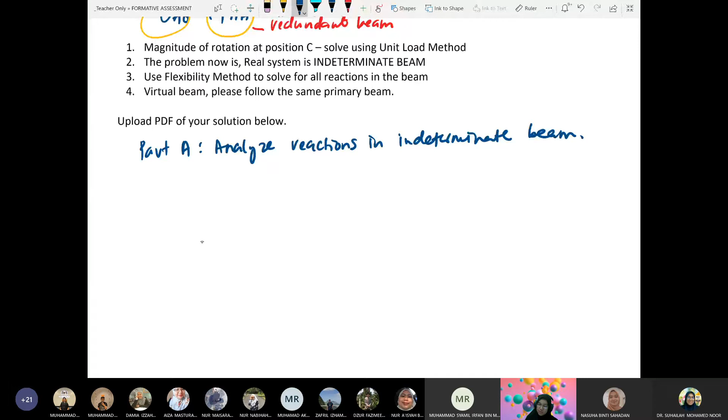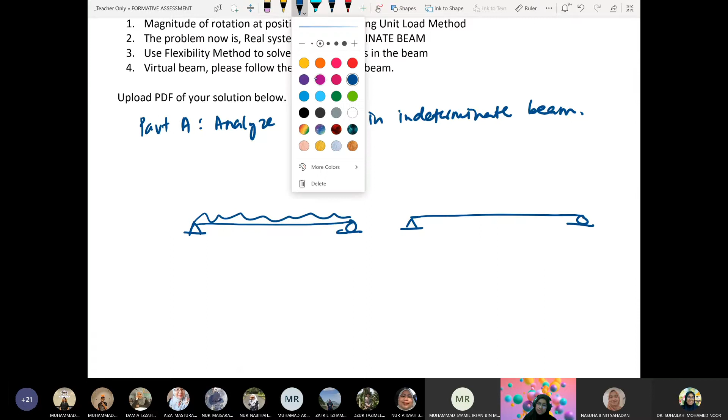Same system, both. A bit slow, sorry. So there's a UDL, then there's a point load. The point load is a counterclockwise moment. Its moment is counterclockwise, here. Okay, so A is here, B, C. So the redundant system will also follow A, B and C.

But in the redundant system, it is subjected to a unit moment. So we apply a unit moment here. Okay, so the whole system has to be multiplied by MA later. These are the two determinate systems that we are going to analyze. In these two systems, we are going to determine the reaction and write the moment equation.

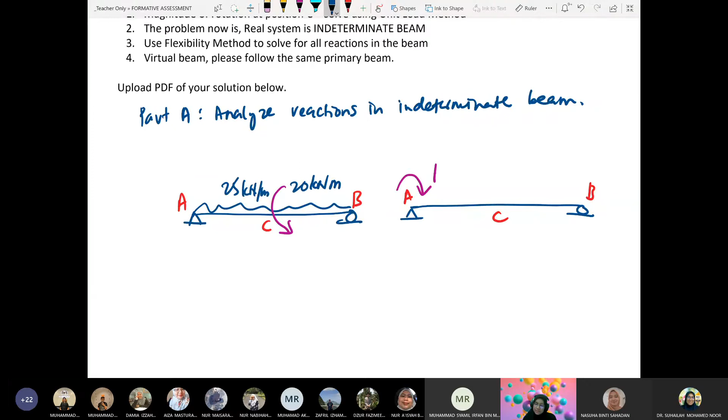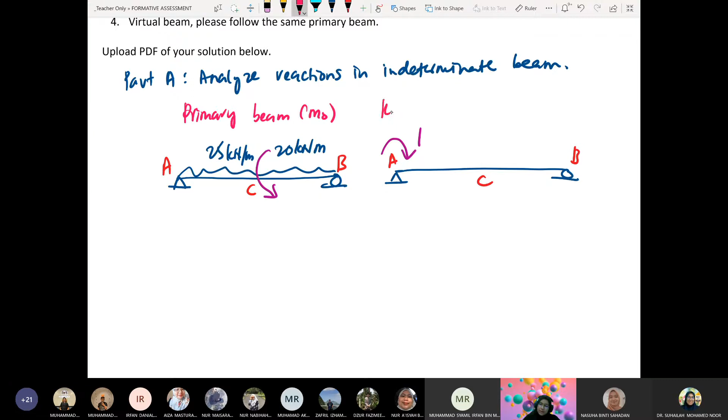It is 25 and 20: 25 kilonewton per meter and this one 20 kilonewton meter. Who considered the simply supported beam as the primary system? What is the reaction at A and at B? AY in the primary system? This is the primary beam. Here we will determine M0, and then we have the redundant system with redundant MA applied.

If you assume pin and roller, and I use a fixed support instead, will AY differ? For the primary system it will be different. One is a simply supported beam, the other a cantilever beam. The reaction, equations and displacement will differ. If you choose BY as redundant, you get BY first. Here we get MA first. But after substituting, we get the same result.

What was AY? 78.33. AY okay. BY is 71.667. The one earlier is 333. Okay, so now calculate the reactions AY and BY in the redundant beam.

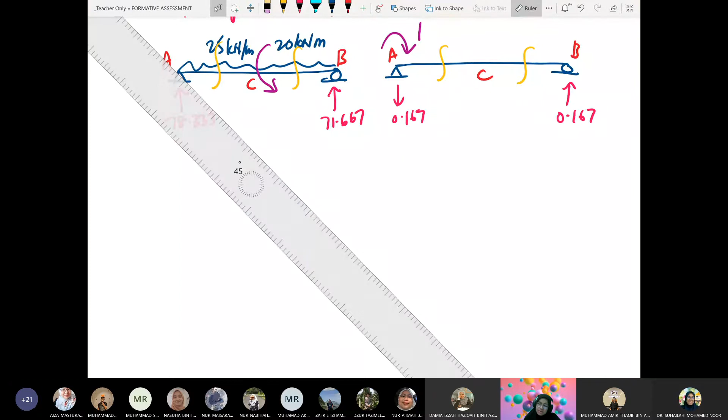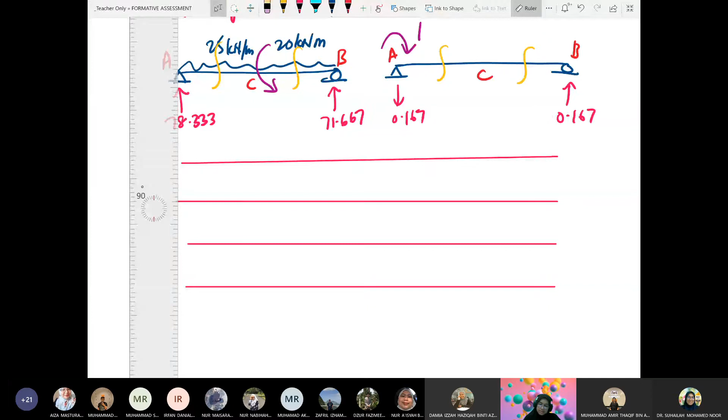In the redundant beam, 0.167. AY is negative 0.167, this one positive 0.167. Okay, so we cut two sections and make a table with member, origin and limit. Two moment equations.

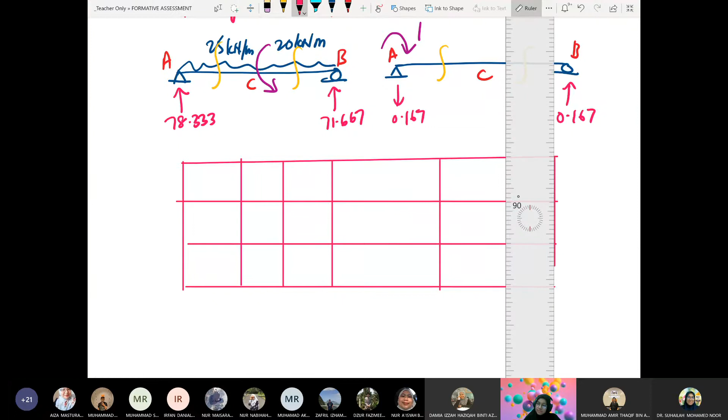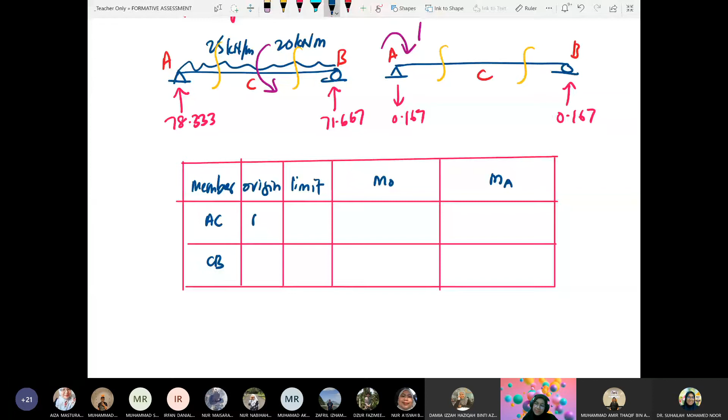So we have member, origin and limit. We have M0 from the primary beam and MA, or M1, depending on the label of our redundant. This is small m; the applied moment is big MA. Sections AC and CB. Origin A for AC, origin B for CB. Limits 0 to 3 for both.

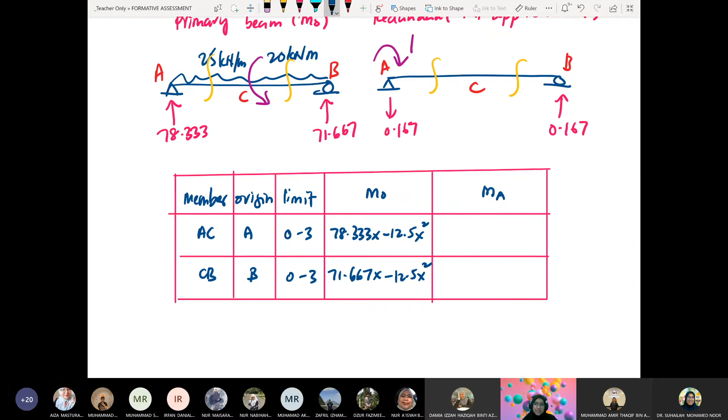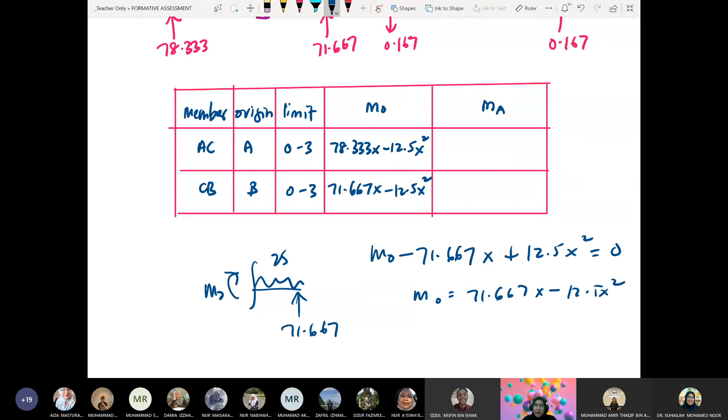For AC, M0 is 78.333x minus 12.5x squared. For CB, we have 71.667x, minus... check. M0 minus 71.667x plus 12.5x squared equal to 0, so M0 equals 71.667x minus 12.5x squared. These two equations are for the primary system.

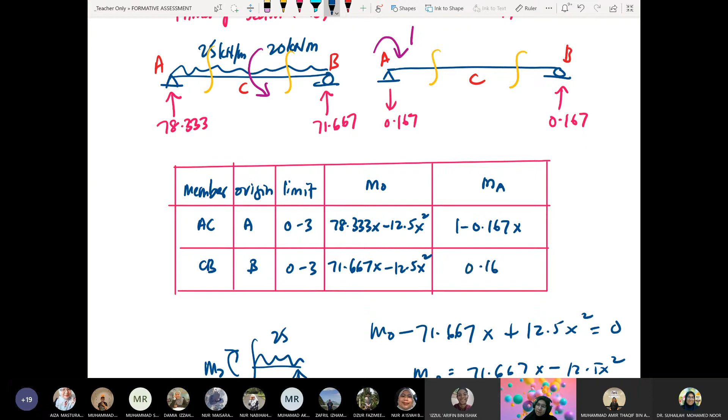Then for the redundant, with MA applied: for AC, it is 1 minus 0.167x. For the other, it's opposite, so positive 0.167x.

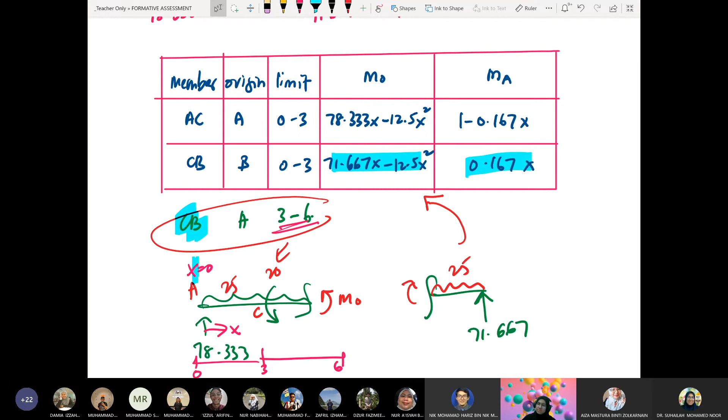Now we integrate for member AC. For member AC, it is integration of 1 minus 0.167x, tutup kurungan, square. Limit from 0 to 3. The answer we divide by 3. Okay, apa kita dapat? Saya dapat 0.583. Divide by EI ya? Sama.

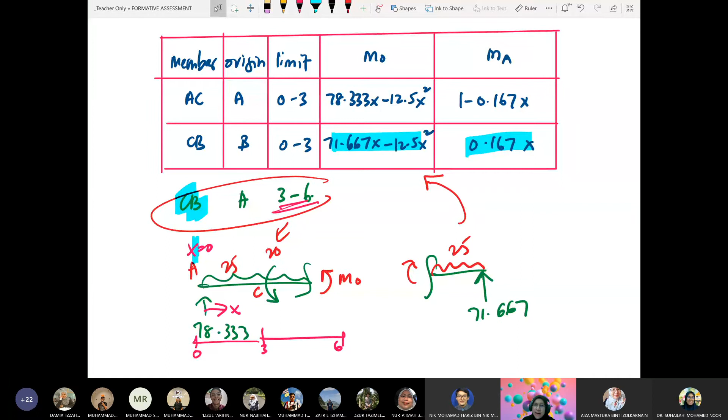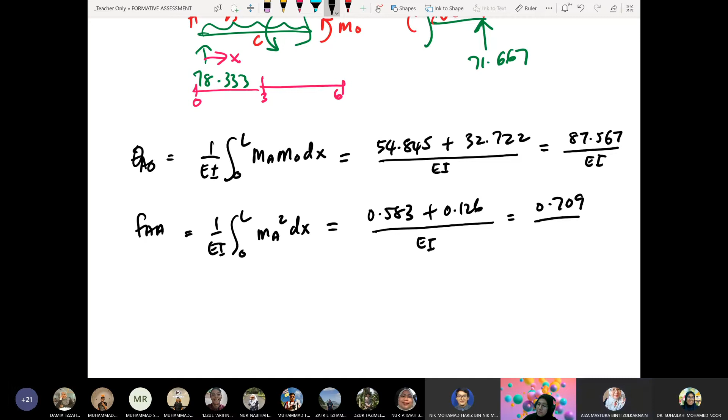We do the same for section number 2. We integrate 0.167x, kurungan, square. Limit from 0 to 3. The answer we divide by 2. It is 0.126. Okay, total? 0.709. 0.709 over EI.

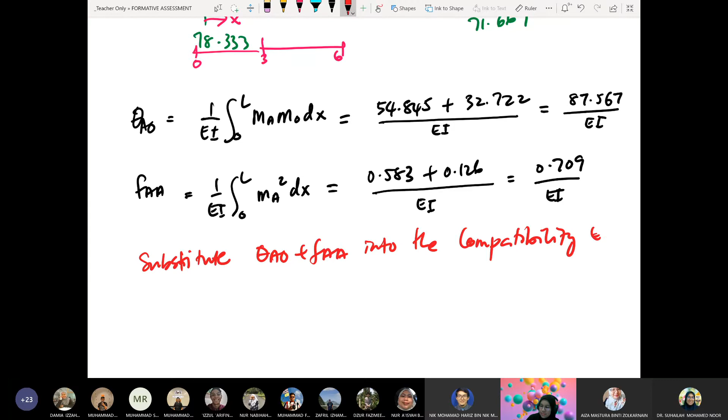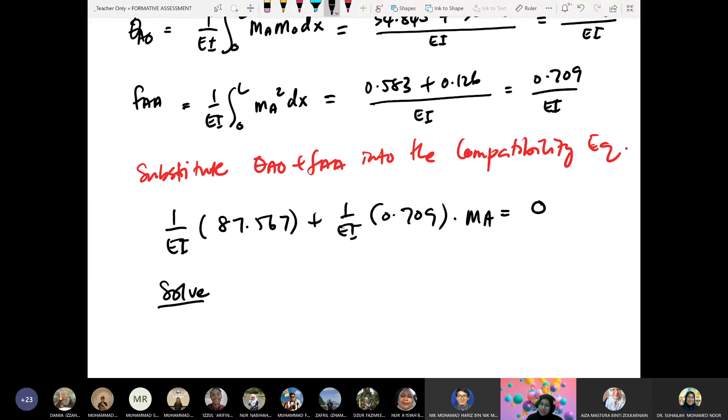So now we substitute theta A naught and FAA into the compatibility equation. It is 1 over EI 87.567 plus 1 over EI 0.709 times MA equal to 0. So when we solve, we cancel the EI and we get MA. Tadi dua-dua positif, so dapat ni negatif lah.

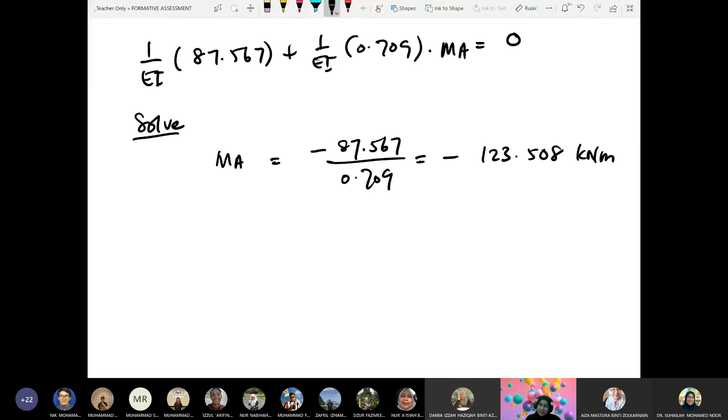MA equals negative 87.567 divided by 0.709. Negative 123.508 kilonewton meter. So having this redundant, we now determine the remaining reactions.

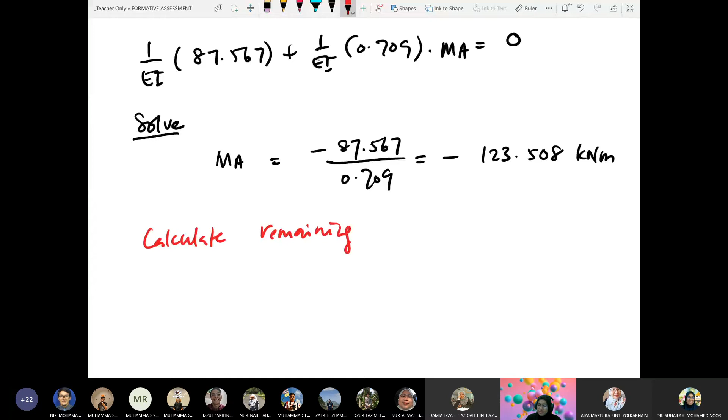So it is AY in actual system equal to 78.333 plus negative 0.167 times MA, negative 123.508. So what do we get? 98.959 kilonewton.

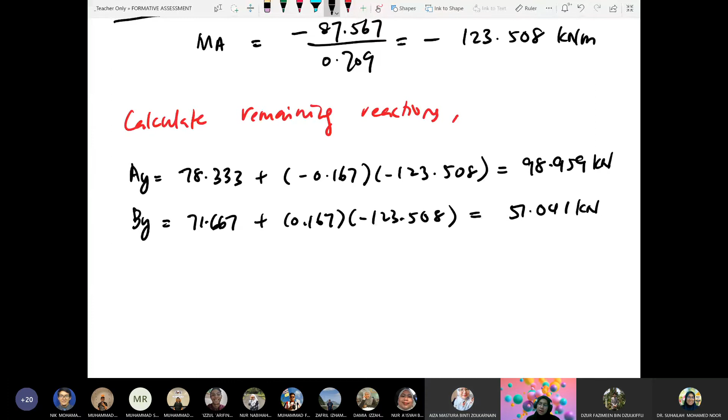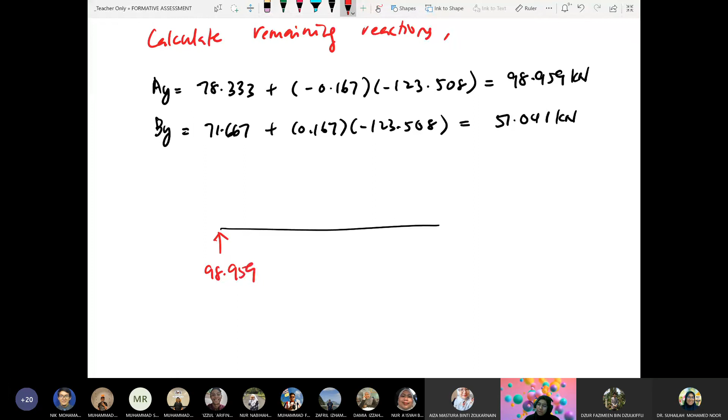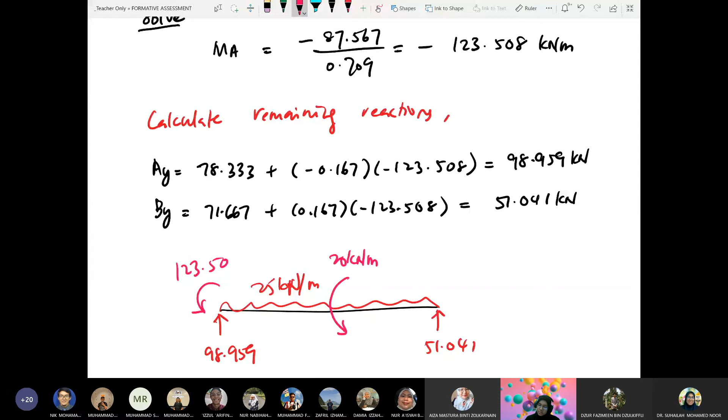So we can check if we draw back the diagram and put all the values that we have determined. AY 98.959, BY 51.041. UDL is 25 kilonewton per meter. Then there is a couple moment of 20 kilonewton meter. Fixed moment 123.508.

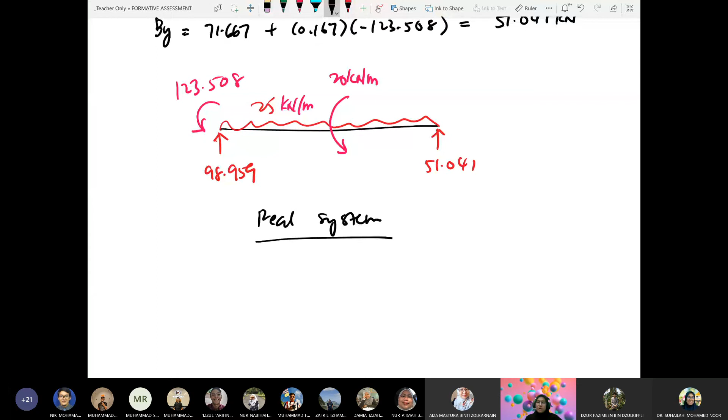The real system. When we want to determine displacement, rotation, deflection, we must have the real system and the virtual system. This is an indeterminate beam, so we have to solve for the real system using the flexibility method first. Then the actual system is the real system, and we have to apply a unit moment at C in the virtual system. So we will have another system called the virtual system.

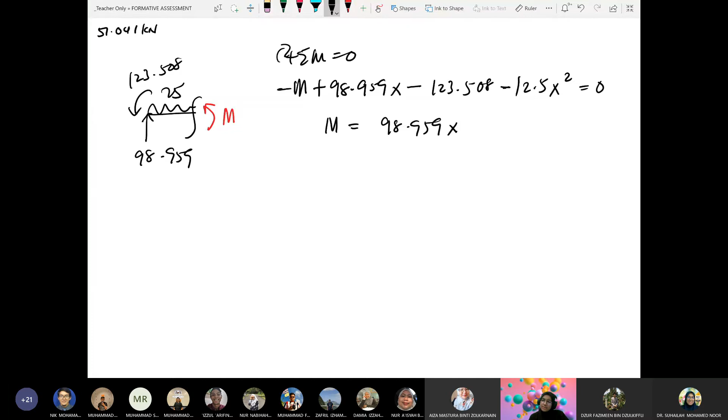So M equals 98.959x minus 123.508 minus 12.5x square. This is for AC, origin A, the same limit as before. And then we have section CB.

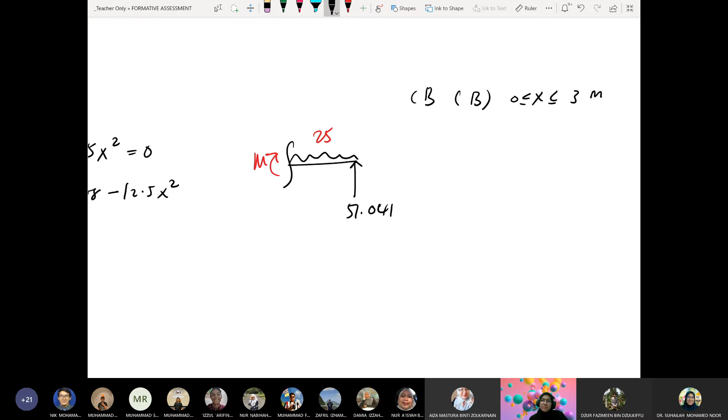So by taking the moment at the cutting position equal to 0: M plus 12.5x square minus 51.041x equal to 0. So M is equal to 51.041x minus 12.5x square. Correct?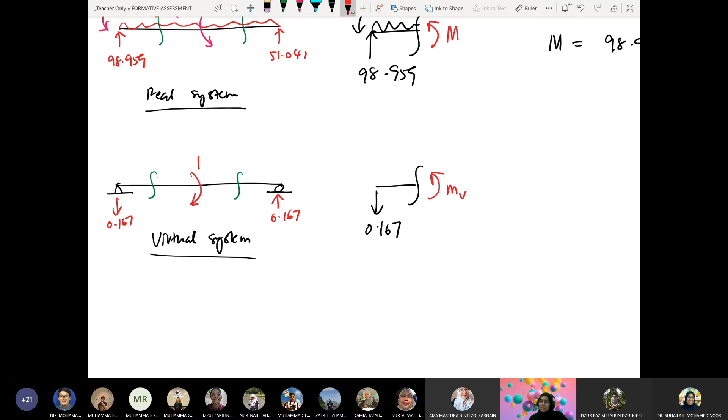Betul tak yang ni? Betul, doktor. Betul. Okay, so kita buat untuk the virtual system. Okay, the virtual system. So we have here 0.167. Okay, so ni dia punya M virtual. So the same limit, the same origin. So we get negative MV minus 0.167x equal to 0. So MV is equal to negative 0.167x. Kan?

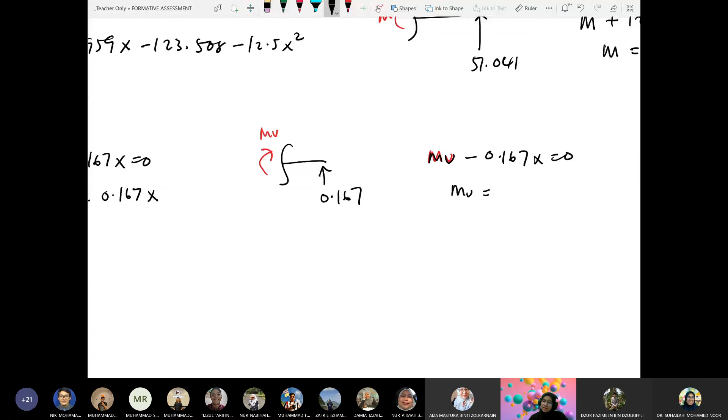Okay, so satu lagi macam ni. 0.167. So moment acting this direction, this is MV. Okay, so we have MV positive minus 0.167x equal to 0. So MV is 0.167x. Okay, so we want to calculate the rotation at C. It is theta C.

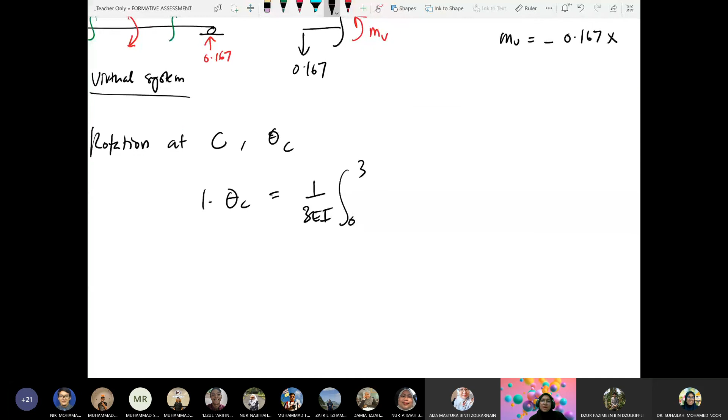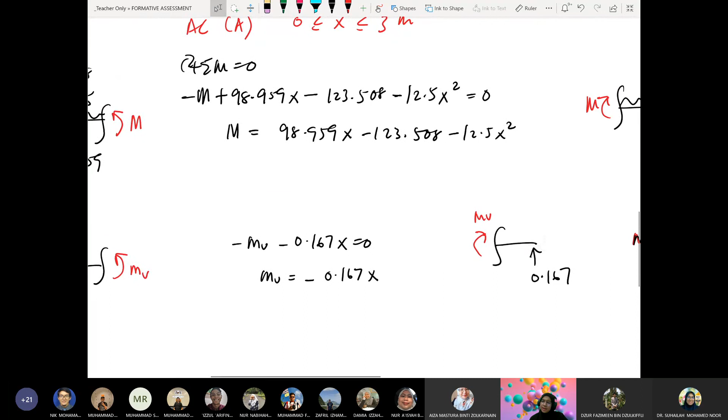Okay, di formula dia kan 1 dot theta C kan. It is equal to 1 over 3EI from 0 to 3. It is 98.959x minus 123.508 minus 12.5x square. Yang ni untuk AC kan? AC kena kali dengan virtual system, right? Virtual system dia negative 0.167x. Kalau pakai table lagi nampak clear lah kan? Okay, dx.

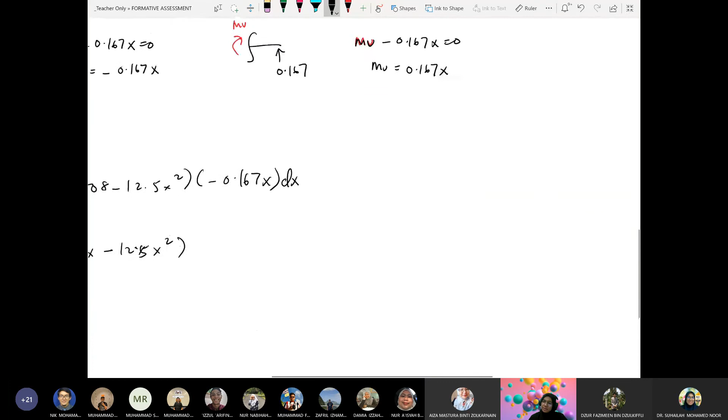Okay, plus 1 over 2EI from 0 to 3. The next section is CB kan? CB tadi 51.041x. Okay, it is 51.041x minus 12.5x square ke? Ya, betul. So kali dengan positif 0.167x. Okay? Then dapatlah theta C berapa? Cuba calculate.